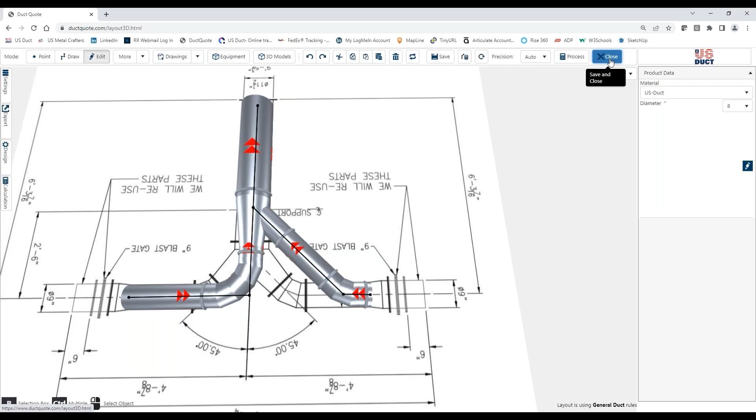So let's take a look at example number 3. Now, example number 3 I've titled 'There's No Such Thing as a Branching Elbow.' By that, we have often had people draw a branch so close to something that it in fact causes what amounts to a branching elbow.

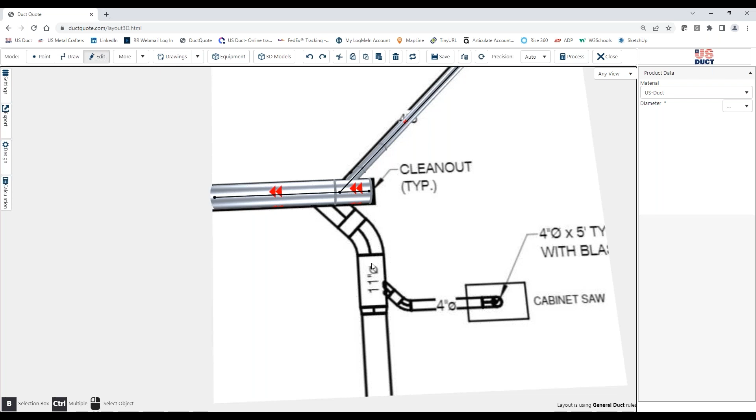I actually, just before we started this morning, found what I think is a better example here. So here's what I'm going to do. I'm going to bring that on as an example of how you might see the line drawing. You can see that right in the middle of the elbow, somebody has drawn a branch expecting it to happen there. Well, that really cannot happen. We can't do that with a standard piece.

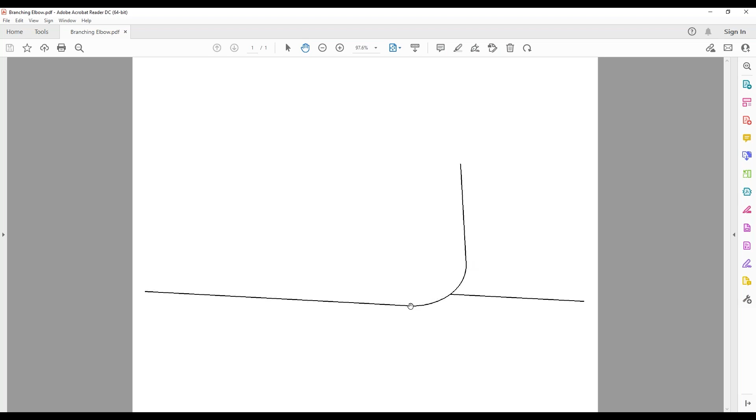Now, if you had to, you could build some kind of special thing. But again, there's a way around this. So if you'll allow me, I'm going to turn off the drawing, and what I'm going to do is offer the following.

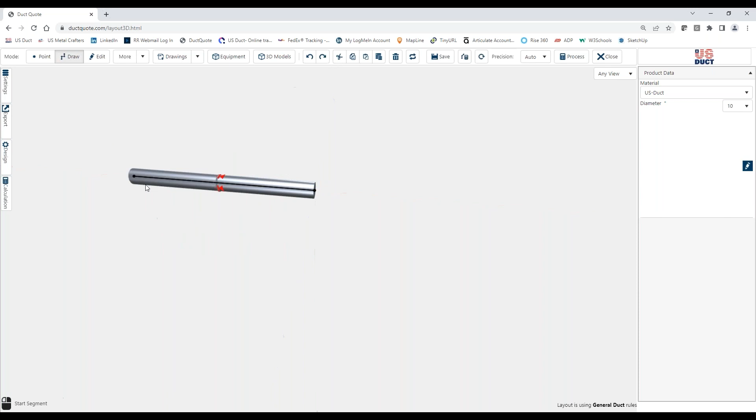We're going to come up and draw, using, let's say, 10-inch duct. We're going to say that's going there, and pretend this was that elbow they were trying to draw their branch from somewhere in there with, say, a 4-inch. Well, as you can see, that just isn't going to work.

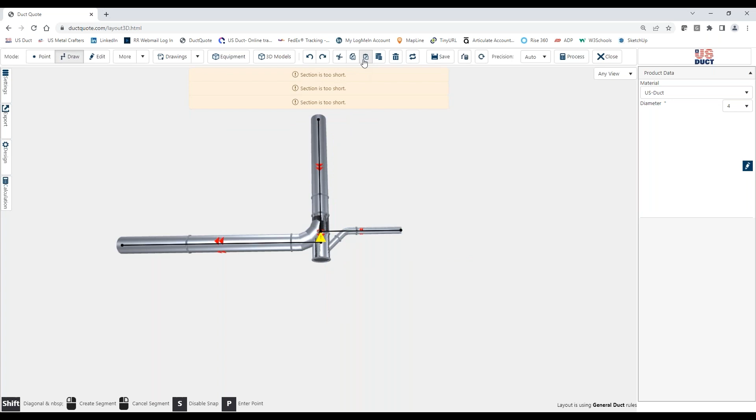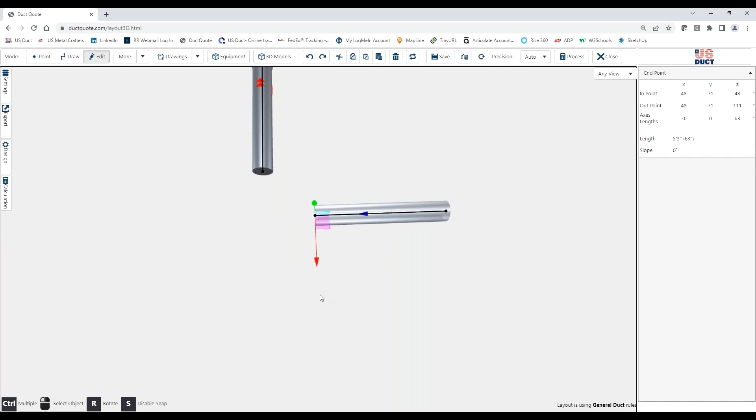Let's take a look at how we might fix this. We have to turn the corner, but if we can back up slightly, and even back up slightly here, and then bring these two together, let's say at a 45-degree angle. We're going to say that both of these now have 45-degree elbows.

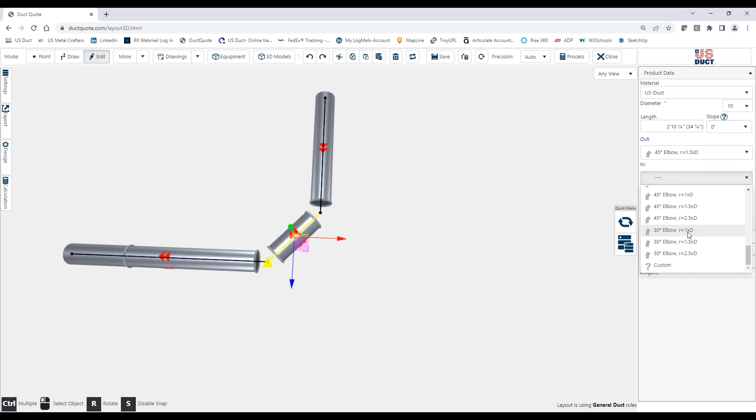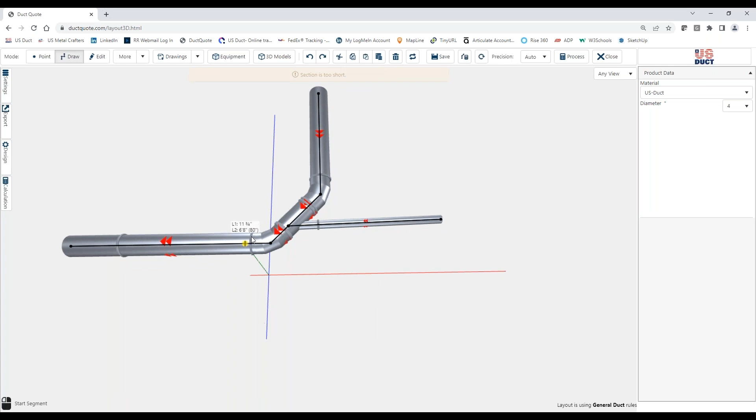We can now take that 4-inch piece, and you can see here, now that works. You've still got the turn and you've got your 4-inch piece, essentially in the same position it was before. So that would work both for the positioning of their piece of equipment, as well as making the right-hand turn without changing where these two trunks really are. The only difference is you're cutting the corner slightly right there, okay?

Now, stacking fittings on top of one another works as long as you allow for the appropriate space, just like we've mentioned. You cannot merge things into each other without creating some kind of custom part. It's very important to remember that some things available in galvanized are not available in stainless steel. This goes back to planning again. The same is true with different gauges—some things are available in certain gauges and not others. There actually is a machine with limitations on what it can roll, bend, and process, and that's part of how we determine what's available in gauges and sizes.

So here's my final mention about planning. We've gotten a few requests for the ability to merge one layout into another—in other words, they've drawn two separate systems that go into the same space and want to bring those layouts together to combine them. This is fraught with massive complexities as far as programming that in a program like DuctQuote.

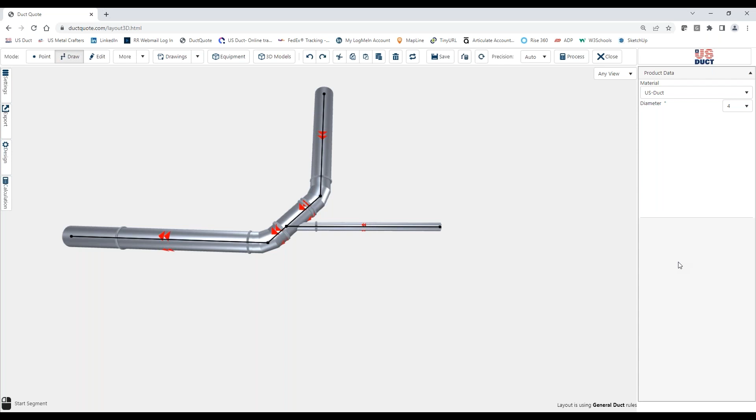The biggest and probably easiest to understand is the scaling involved. In one drawing, the literal distance representing, say, 6¼ feet or 6 feet and a quarter inch, may not be exactly scaled the same in the second layout. And that's the problem.

To be able to merge them, not only must the scaling be exactly the same—identical—but there has to be some sort of reference point common to both layouts, and the receiving layout has to be large enough to accept everything in the two being combined. Well, that's really kind of rare; it's almost never identically scaled. Because of that, we just do not have the merging of two layouts in DuctQuote.

Instead, back to planning: if you believe you're going to be asked to show a combined or full layout, plan to draw it that way. Draw the entire set of layouts all together as a single entity. Then create copies and delete out the parts that don't need to be in that particular copy. That way you've got the combined layout as well as the individuals, and you can print the individuals as their own orders or their own layouts.